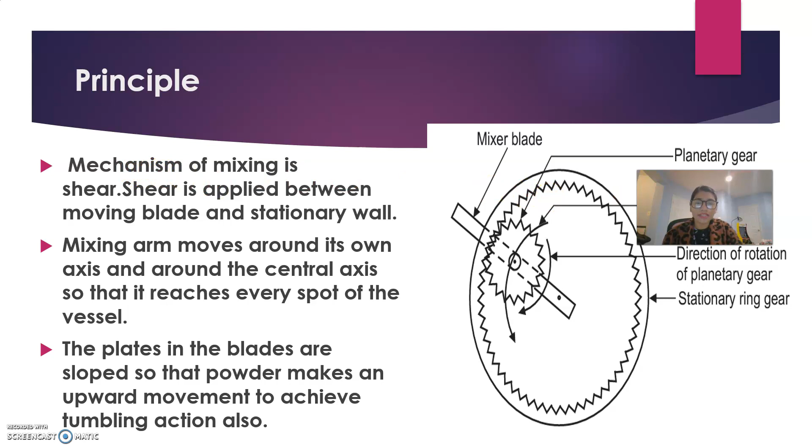The mechanism of the mixing is shear. Shearing is applied in this machine. The shear is applied between the moving blade and the stationary wall. This blade will be moved, and the wall or the vessel where the mixing takes place will be stationary. We are going to see this in detail in further slides.

The mixing arm moves around its own axis. The speciality of this paddle is that it moves around its own axis and around the central axis of the whole vessel. For example, the Earth revolves around the sun and it rotates itself too. You can relate this with this paddle.

That paddle moves through the vessel or the bowl, like this and like this also. The plates in the blades are sloped so that the powder makes an upward movement to achieve a tumbling action too.

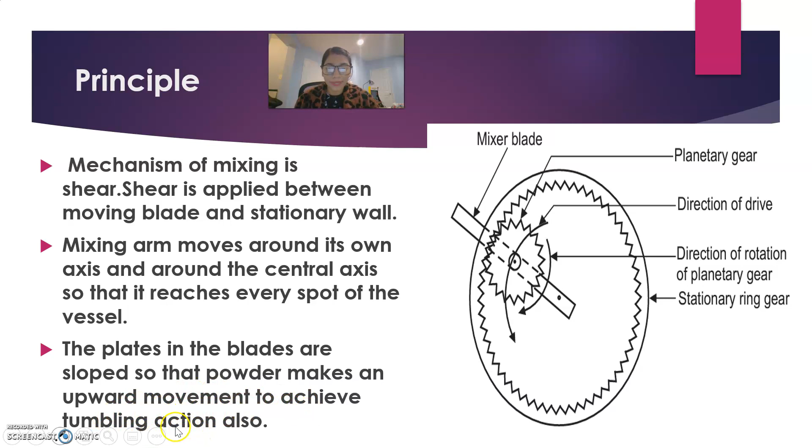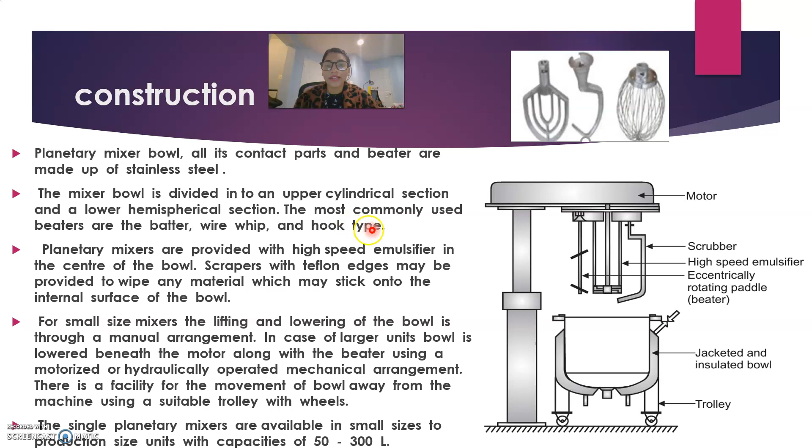The most commonly used beaters are the batter, wire whip and hook type. You can see this is a hook whip, this is the whipper, and this is for the mixing purpose. With this hook the kneading can take place, with this the cream can be whipped, and this paddle is for the mixing of the mixture.

The planetary mixers are provided with high speed emulsifier in the center of the bowl. You can see this is a scraper. The use of this scraper is to wipe any material which may stick to the internal surface of the bowl. If any material sticks over here in a wet or dry mixture, it can't be rotated through the whole mixture. So this scraper will scrape it so that it comes back to all of the mixture.

For small size mixers, the lifting and lowering of the bowl is through a manual arrangement. In a small size mixer, for household or small purposes, this paddle can be removed or detached by the knob provided over here, so we can lift and remove the paddles.

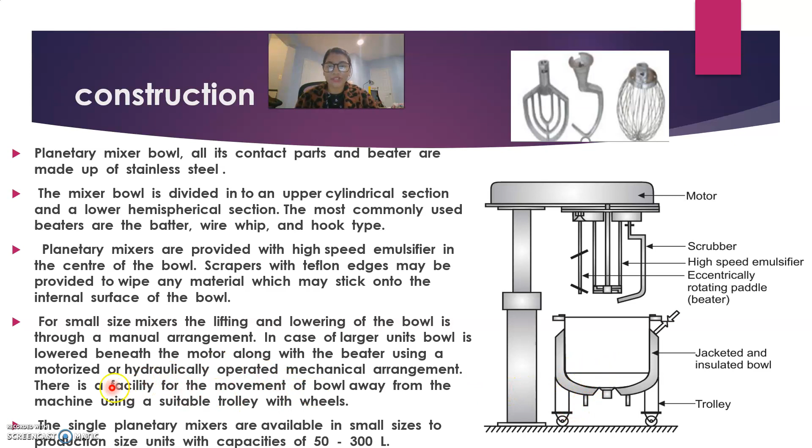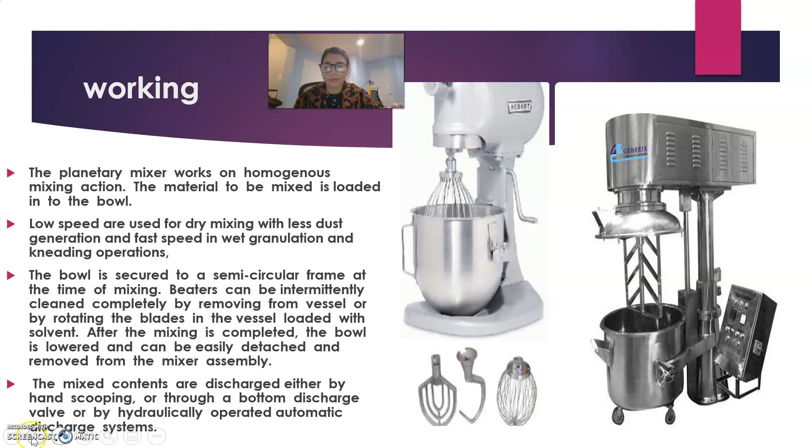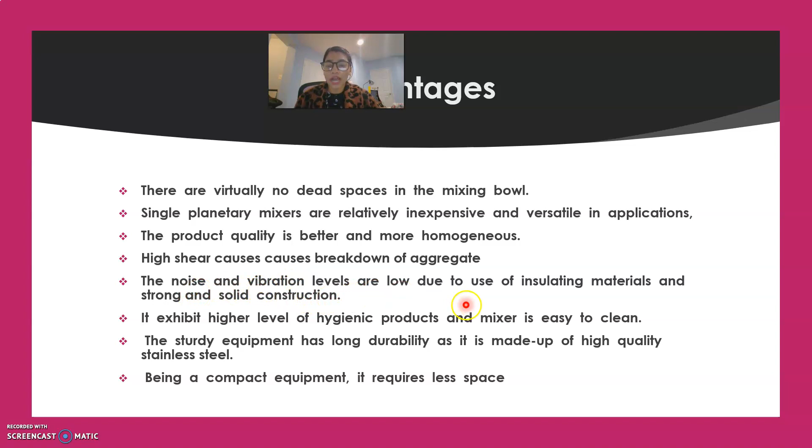The noise and vibration levels are low due to the use of insulating materials. It exhibits a higher level of hygiene, and the mixer is easy to clean. The equipment has long durability, and it is made of high quality stainless steel. Being a compact equipment, it requires less space.

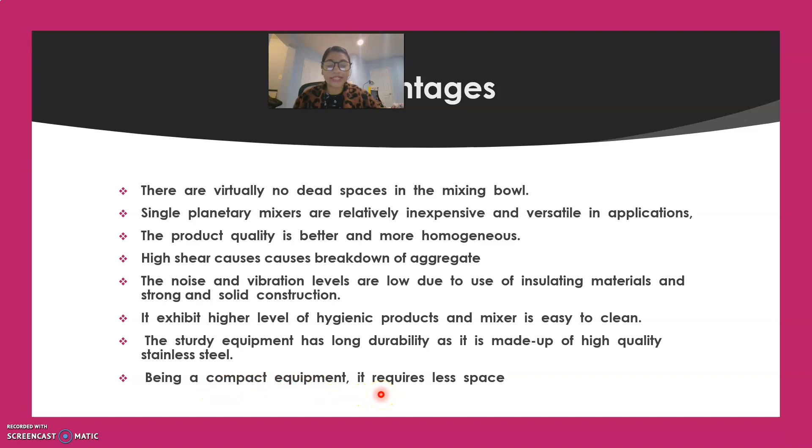The disadvantages: the equipment generates heat which may be unsuitable for proper mixing. When handling high viscosity material, the energy required is more. If the solvent is highly viscous, more energy will be required for proper mixing. As the equipment consists of moving parts, maintenance is required.

We saw in the construction and working how the paddle is removed, how the bowl is uplifted and brought back, or how the paddle can be detached. So the moving parts are there, and for that maintenance is required. As the labor requirement is more, the process cost is high. To remove the paddle or the bowl, and to discharge the material, the labor requirement is more.

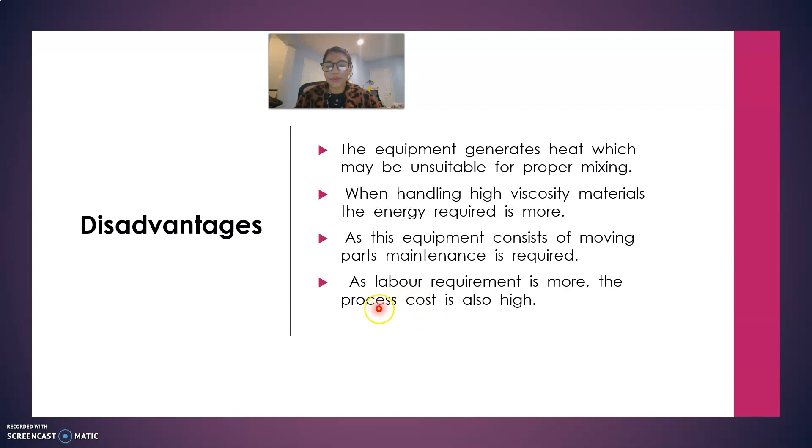Now lastly, we are going to see its applications. The single planetary mixer has a common application in pharmaceuticals for ointments and mixing of drugs, and for food purposes in bakery, for kneading the dough or dough formation, for beating, for whipping the cream. For bakery purposes, it has many advantages.

In chemical and cosmetic industries, planetary mixers are used for wet and dry solid material mixing. This is one most important application: both wet and dry solid materials can be mixed properly in these planetary mixers. The single planetary mixer is used for mixing light pastes, gels, and dough, as we already talked about. This mixer is commonly used in food and bakery industries.

These mixers are designed for intensive mixing, dispersing, kneading, pastes, coatings, and there are different types of advantages of this mixer. And for similar products of medium to high viscosity, it also mixes materials having high viscosity, but it needs more energy to mix viscous material.